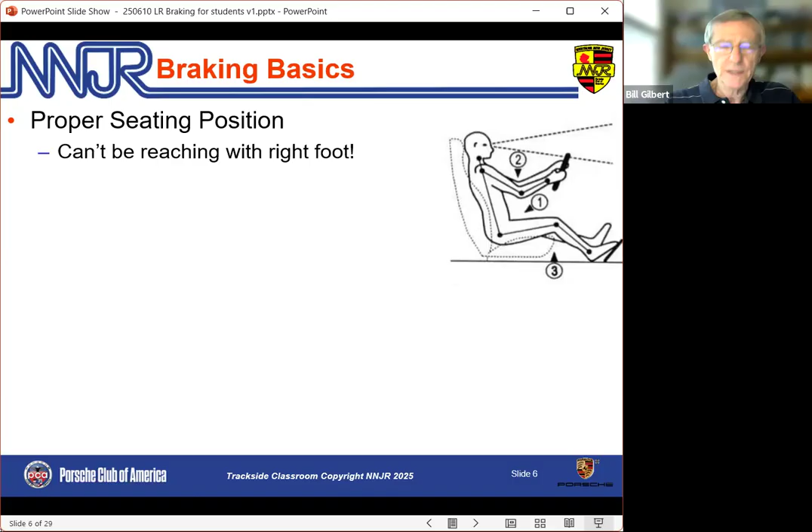Our right heel should stay on the floor. It should pivot between the gas pedal and the brake pedal. You shouldn't have to move your whole foot — we simply want to swing that foot. And if you're not doing that, then obviously that's a first step to practice.

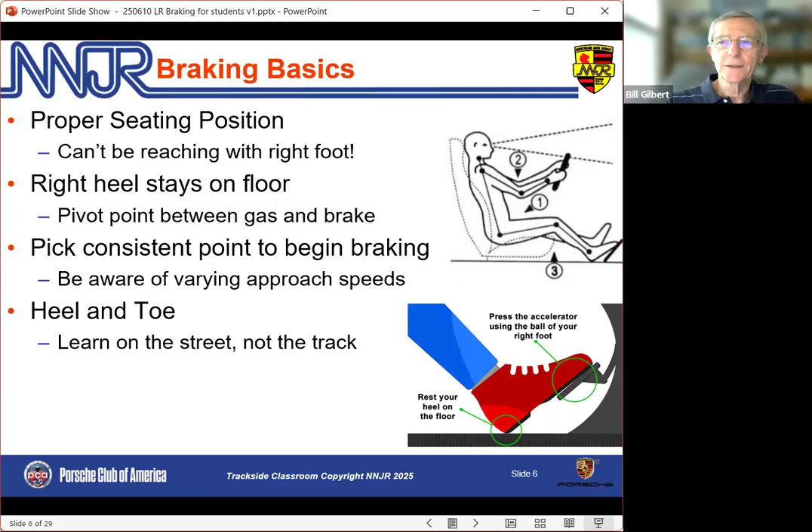As a beginner, or even maybe a yellow or blue student, we want to have a consistent point where we begin braking. I highlight that because you're probably, as a student driver, going to be approaching that brake point at different speeds depending on how well you did the previous corner, or perhaps traffic in between. Using a consistent braking point and learning to adjust using that same point is an important step in your learning process. And if you do have a car with a manual transmission, it's hard for us to teach you heel and toe on the track — you need to practice that and learn that on the street.

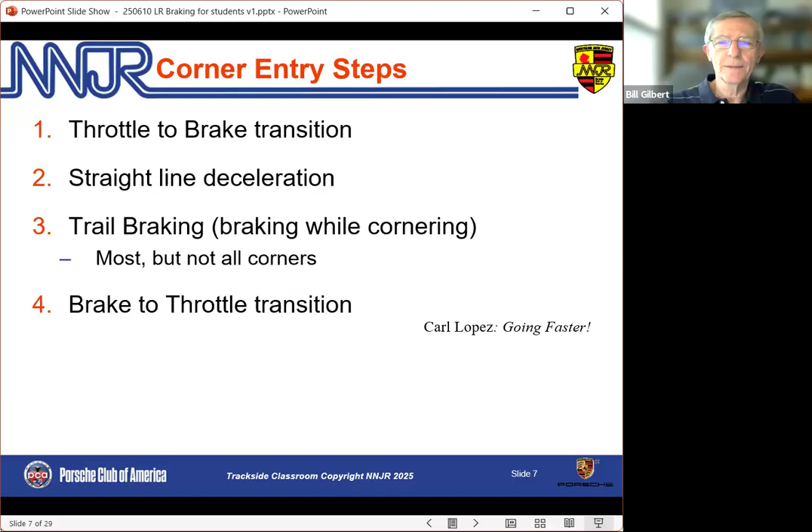So as a next step, what are those corner entry steps? We're now going to zoom into step three in the original outline. If we break it down, we're going to pivot our foot from the gas pedal to the brake pedal, and we're going to do that as quickly and smoothly as we can.

Then we're going to press on the brakes to slow the car down in a straight line, and by the way, that's where 90% of the slowing or more should happen — in a straight line. Then in most corners, we're going to continue braking at a very light level as we turn in, and then at some point after we turn in, we're going to come off the brakes and get back on the gas.

That point of coming off the brakes is called brake release. As Ross Bentley says, that's where the magic happens. If you're an advanced student, that's something you should pay a lot of attention to, and your instructors may have already pointed that out to you.

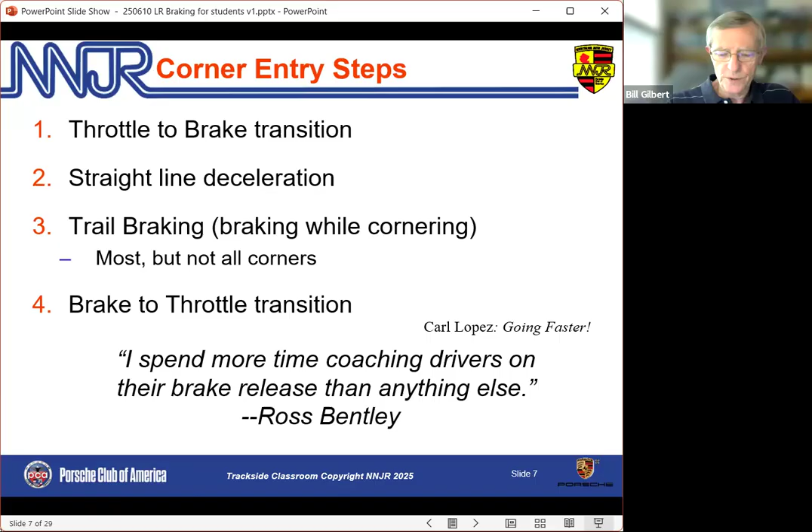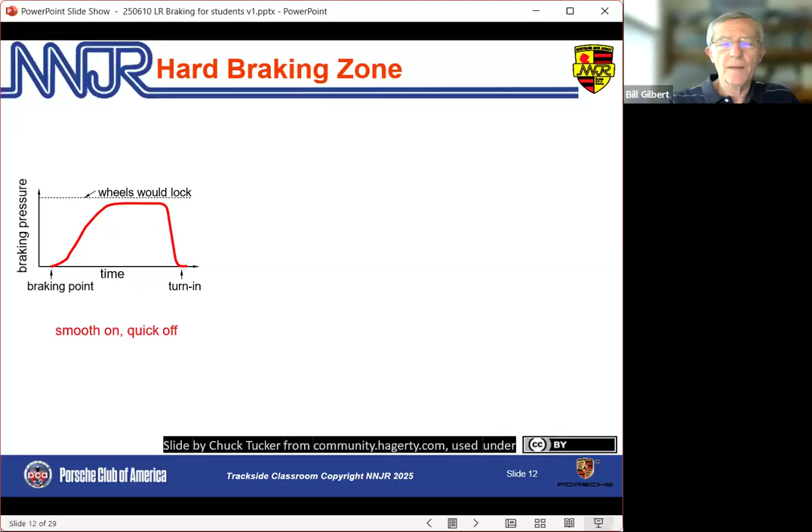Now let's talk about a hard braking zone. If this top line, where it says wheels would lock, is maximum braking, here's an example of getting on the brakes smoothly and then coming off very quickly, almost jumping off. Here's a different example where we get on the brakes immediately as hard as possible, stay on them, and then come off again very abruptly.

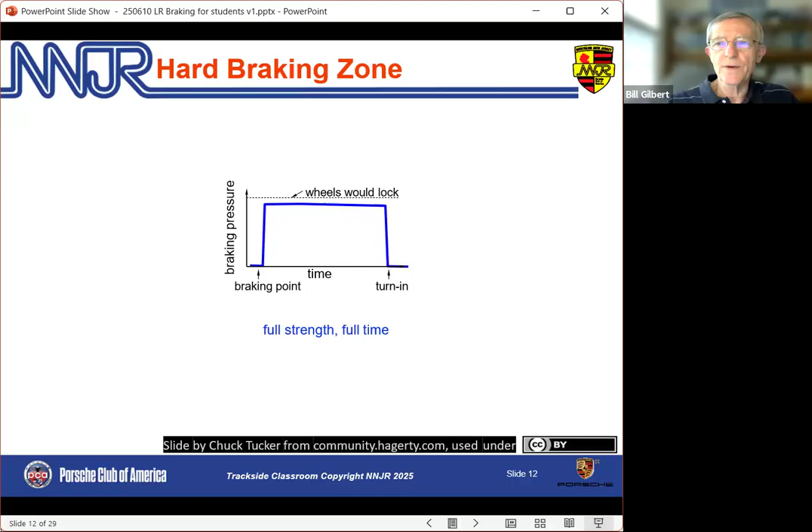Well, neither of those is what we want. This is what we want. This is where braking on the track is the opposite of what we do on the street, because we want to get on the brakes quickly but smoothly, and come off in a much more gradual fashion. How steep that slope is coming off will vary, but the shape should look something like that in virtually every corner.

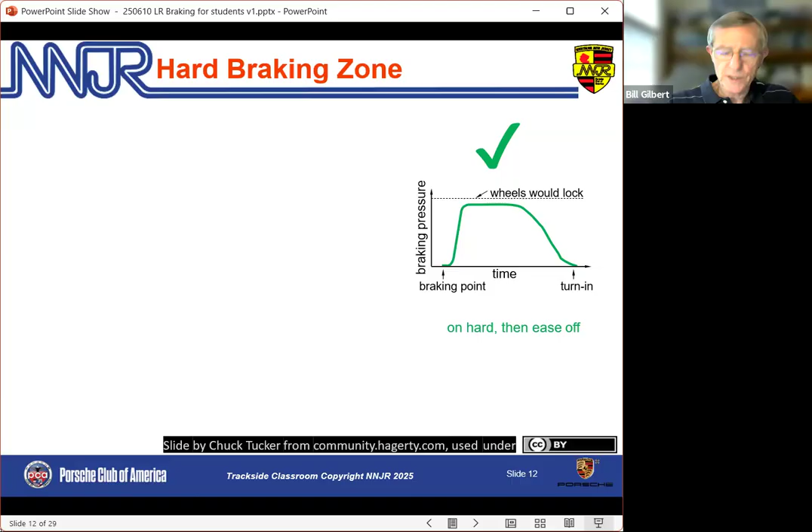So what are some common braking mistakes? If you're a beginner: an inconsistent point where you get on the brakes, inconsistent amount of brake pressure, and jumping on and off the brake pedal is very common.

Also, mimicking what we do on the street, where we get on the brakes at the right point but only softly, maybe at 40%. Then we realize we're approaching the corner and need to slow down a lot more, so we get on more brake. That's the opposite of the graph you saw on the previous page.

For more advanced students, we still see too little pressure early and too much late. Not as dramatic perhaps as a green student, but it still happens.

A very common mistake is going from heavy brake to heavy gas. In other words, we're into the corner, we've gone in on a fair amount of brakes, and we quickly go from that brake right onto the gas pedal. That obviously upsets the car.

And we see people trying to brake late. Most of us aren't ready to brake late in the yellow and blue run group, because if we do that, we put a lot of stress on how smoothly we can come off the brakes and exactly how much we can slow down. We end up with inconsistent entry speeds and inconsistent amount of braking, and the net effect is you end up not being able to exit the corner smoothly.

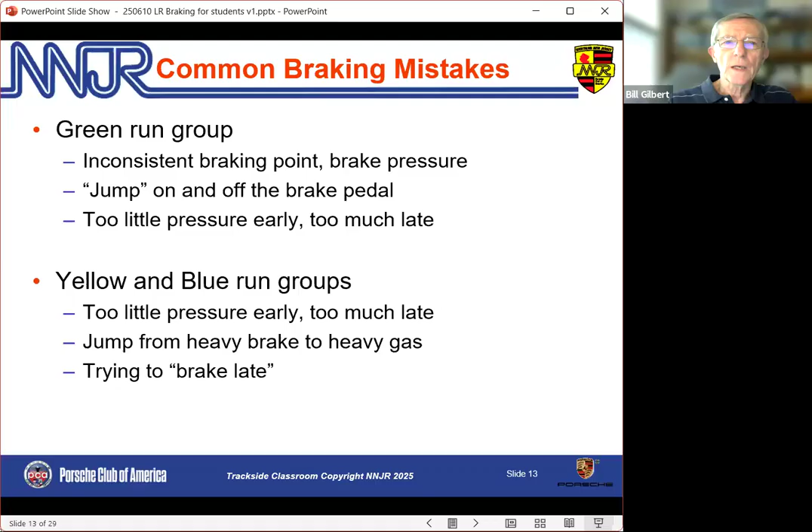So let's look at a couple of tracks. Let's talk about Lime Rock and what that means for braking. There are no slow corners at Lime Rock, but there are high speeds. Really only one heavy brake zone, and that's turn one.

That is a classic trail braking corner, meaning the first half of Big Bend, turn one, is followed by a tighter corner, which means we can't accelerate. So we're going to extend the front straight by braking as long as possible. That's what we mean by a long trail in turn one.

We have somewhat the same situation in the left-hander, where we're trying to set up turn four, the right-hander, and therefore we can carry a lot of brake into the left-hander.

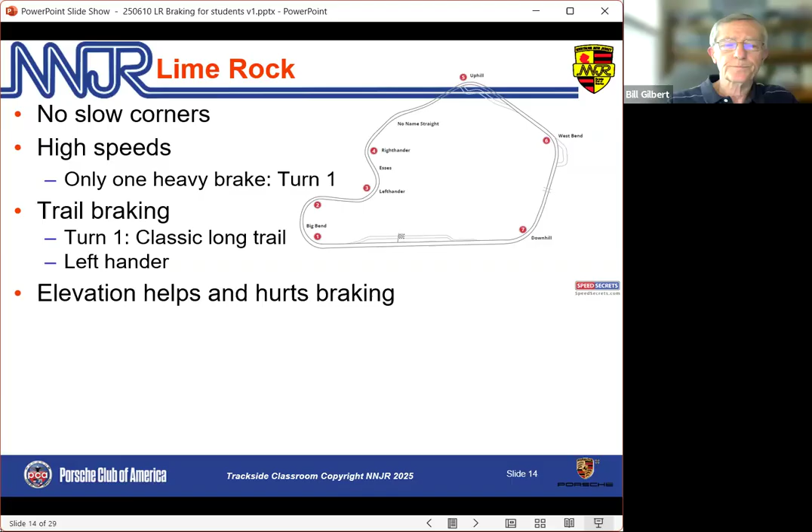Elevation, like all tracks, helps and hurts braking, and the turn names give it away. The uphill is uphill, and that certainly helps our braking. The downhill is the reverse, pretty obvious. Interestingly enough, for a short track, Lime Rock has three fast corners: the uphill, west bend, and downhill are all very quick.

What that means for braking is the opposite of turn one and the left-hander. We do not want to do trail braking; we want to do 99% of our braking in a straight line.

And we want to do that not with a dramatic brake, but with a gentle brake, which means it might start sooner than we think, but be very gentle and come off gently, because we're trying to maintain the balance of the car so that we can get through those fast corners.

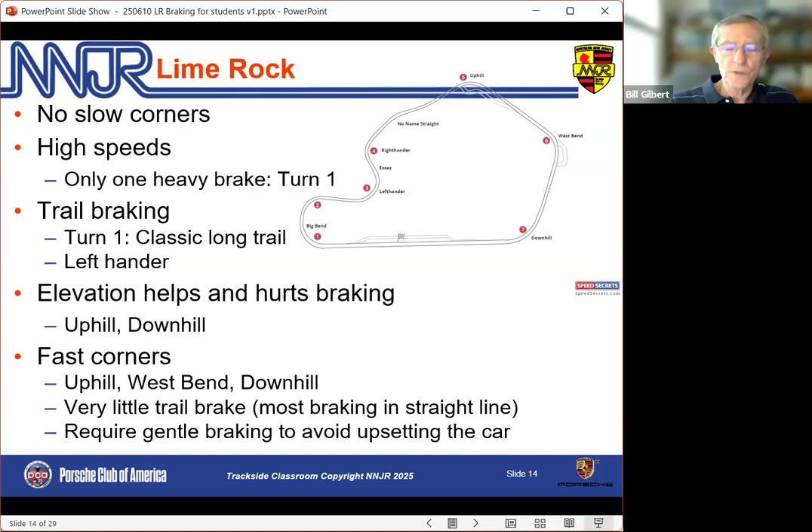Let's talk about Watkins Glen. We can tell a similar story. Again, there's no slow corners. I've sometimes called Lime Rock half of Watkins Glen for that reason. But in any case, there aren't any slow corners. There are high speeds, and that results in two really heavy brake zones, especially turn one. But the bus stop is also a heavy brake zone.

We have a number of corners where we can trail in some amount of distance. Each one varies, of course, but turn 6, 8, 9, and the bus stop all reward a fair amount of trail brake. Again, we have elevation that helps and hurts. We have turn 6 downhill followed by an uphill in turn 7. And we have fast corners, turns 10 and 11, just like I described for Lime Rock, very little trail brake, and do it in the same gentle fashion.

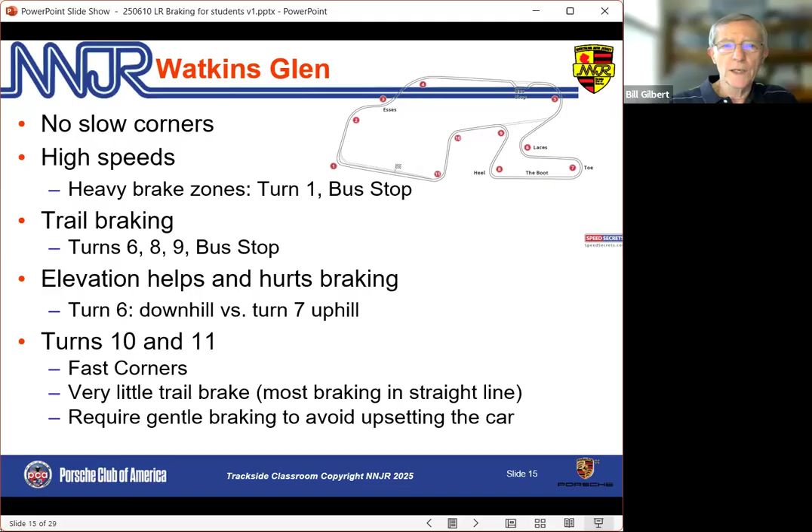So to help think about how we use the brakes, I ask you to think about brake pressure on a scale of 0 to 10, where 0 is no brake, 10 is you're in the ABS, or you've locked up the wheels in an older car. For maximum braking, we want to be at kind of 9.5, just before the wheels lock up. But that's how we should think about how hard we're pressing on the brake pedal.

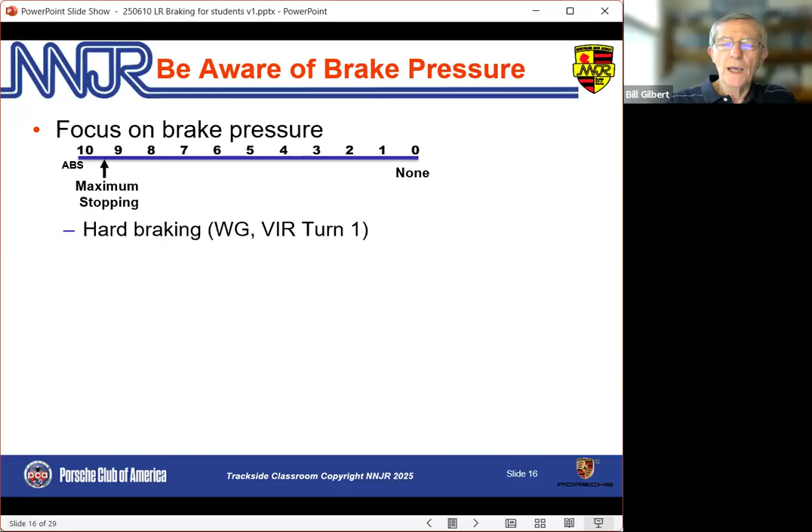And for those really heavy brake zones, like that Watkins Glen turn one that I showed you, same thing at VIR turn one, and to a lesser extent at Lime Rock, we want to get on the brakes and use them. We want to get to that 9 or even 9.5, in the early part of the brake zone.

But look what happens as we get further into the brake zone. Yes, we stay at that hard brake, but now we begin to lessen the amount of brake pressure, for two reasons. One, we want a smooth trail off, but secondly, as we slow down, we don't need as much brake pressure. The same amount of brake pressure will lock up the tire, or activate the ABS. So the car naturally wants us to do this anyway. And at some point, depending exactly on the corner, at two or three, or somewhere in that range, maybe between one and two, we're going to turn in.

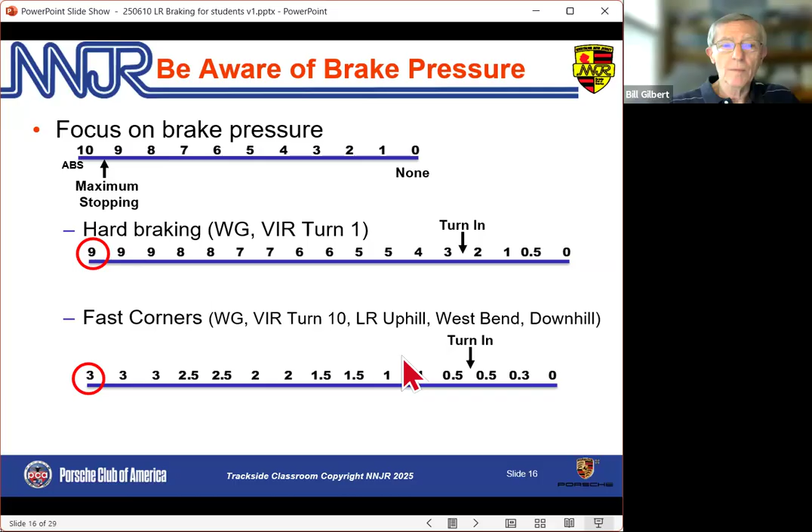Now, fast corners look very different. Here we're talking about Watkins Glen or VIR turns 10, the uphill, downhill, and West Bend at Lime Rock. Here we want to start braking at probably a three or something like that. And we want to just do a slow, gentle trail off. So by the time we're turning in, we're barely on the brakes at all. Maybe we're not on the brakes at all whatsoever. Depends a bit on the car, but you get the idea. And not much at all by the time we get to turn in.

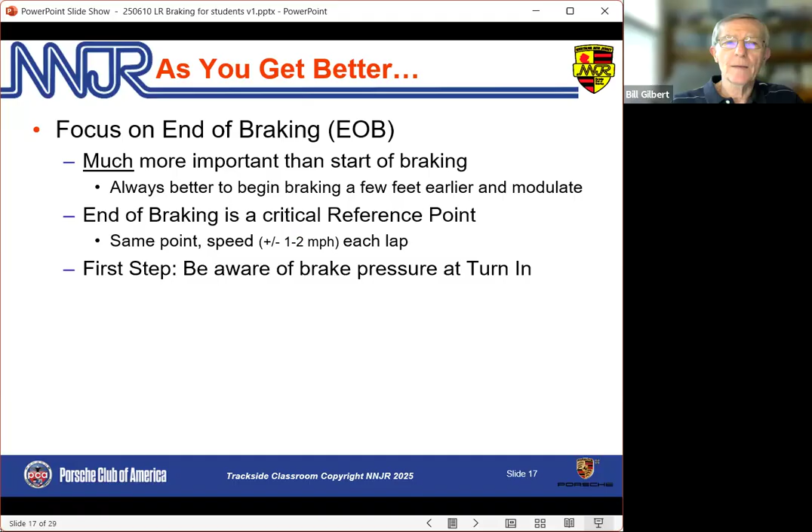Now, as you get better - here's for those of you in blue and advanced yellow - focus on your end of braking. Am I coming off? It's much more important than the start of braking, because we can always brake a few feet earlier and modulate to get to the same end of braking point, which is why it's such a critical reference point.

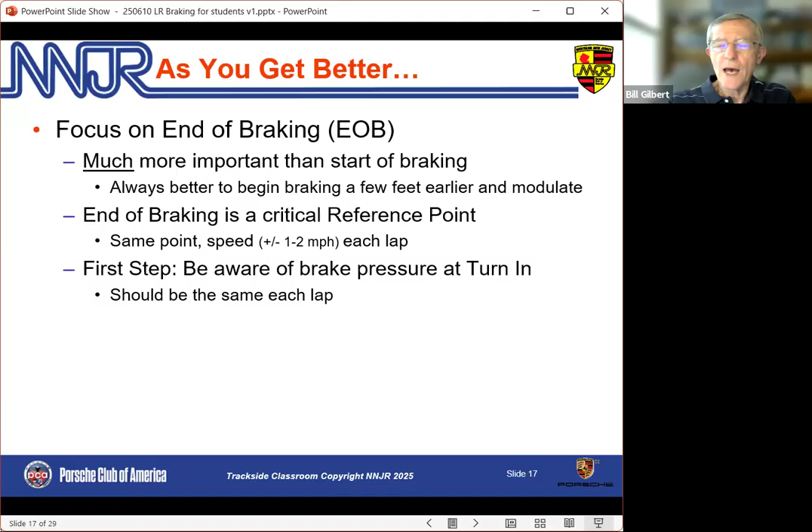And you want to be aware of not only where that point is, but how you're coming off the brake at that point, and focus on making that consistent. And one way to help with that is to be aware of your brake pressure, your amount of brake pressure at turn in, and make sure that's consistent. If it's a 2.5, make sure it's 2.5, lap after lap. If you're a beginner, you can ignore this slide, other than as something that you can strive for down the road.

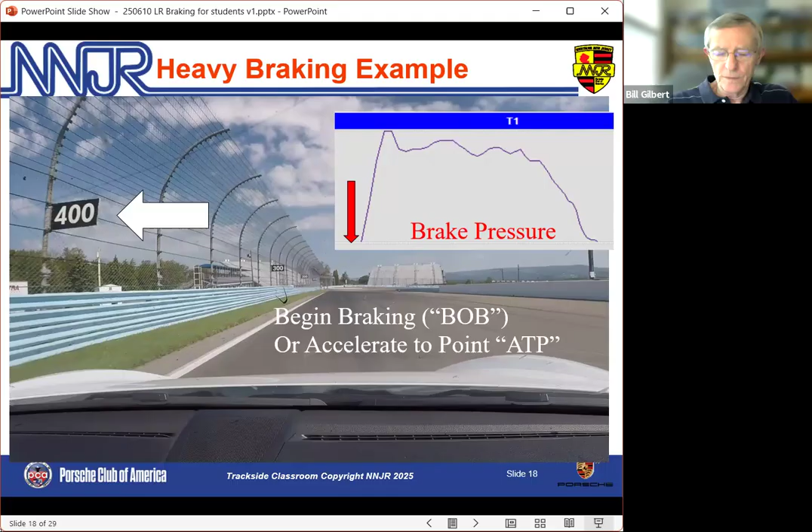Now, here's a heavy braking example to kind of show you a real world example of what this means. And here we've got real brake pressure now. This is a brake pressure trace from my car, and shows you exactly how much brake I was using. In this example, same slide I used earlier, I'm not on the brakes yet here. I'm just moving my foot from the gas pedal, swinging it over to the brake pedal at the 400 mark in this example. By the time I'm at 350, now I'm on the brakes and I'm ramping up the pressure.

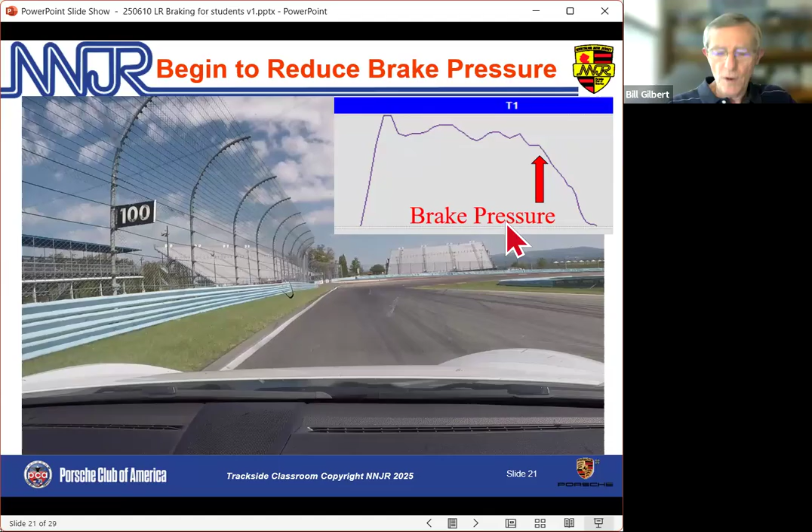By the time I'm at 300, I'm on full maximum brake pressure. And notice that brake pressure holds pretty high for a while. In fact, you're going to see it stays up there until almost the 100 mark in this example. And then it begins to taper off, because by the time we get to turn in, we can't be braking that much or the car won't turn, right?

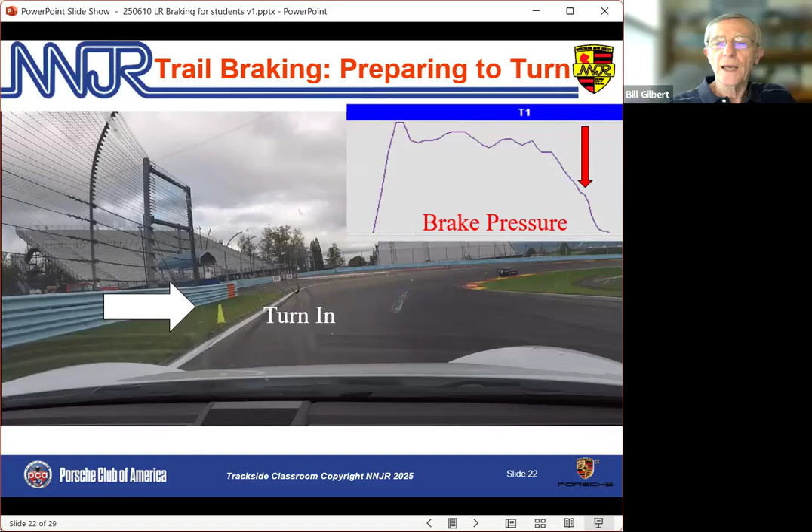At turn-in, my brake pressure has dropped a lot. I've come off the brakes, and the more I turn in, the more I come off, to the point where halfway to the apex, there's no brake pressure. That's what it looks like in the real world, in a very heavy brake zone.

Here's what it looks like at Lime Rock for turn one. I come off the gas pedal at the 5 marker and start to move my foot, but there's no brake pressure yet because we aren't on the brakes. In this particular trace, this point here is about 4.5, where I begin to get on the brakes. I didn't do a very good job of getting on them—I kind of pussyfooted around here too long, rather than going straight to more brake pressure.

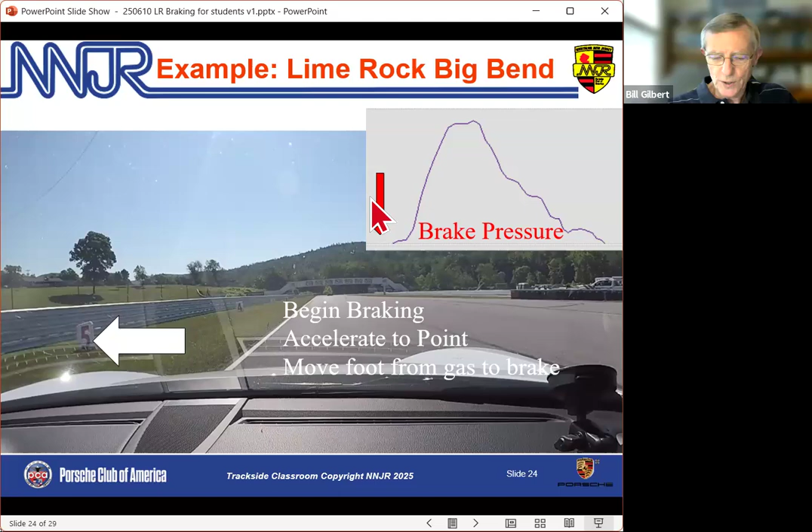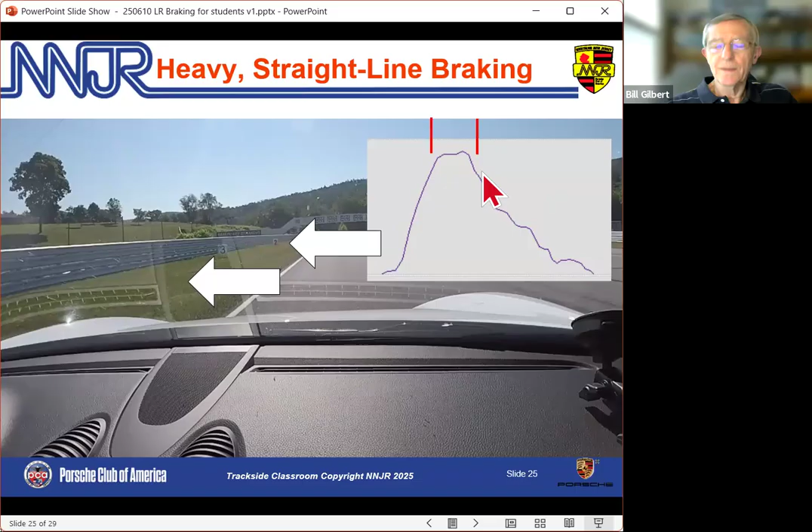But notice there's a peak here, and at Lime Rock in this example, it was from about 3.5 to about 2 on the brake boards, and then began to trail off. As I said earlier, we're extending the front straight into turn one, so we expect to see a long trail off. So here's the one marker.

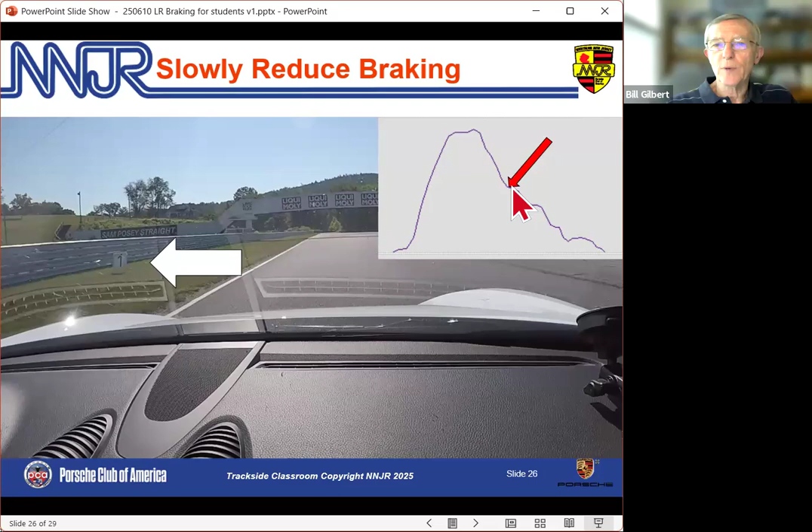Now the brake pressure is well off, but the end of braking doesn't happen until abreast of the first apex. That can be improved if you're really good at it. As a beginner, this would be very good, but I should be doing better than that—my end of braking should in fact be further up, because we're trying again to extend the front straight.

I hope the shape of the brake trace here gives you an idea of how to think about this kind of long trail type corner, which is somewhat different than what you saw in the turn one Watkins Glen example, where we have a more classic corner with a short amount of trail brake versus this one with the long amount. So to summarize, if you're a beginner, you've got to focus on that track braking technique.

Make sure the seating position is solid, the heel pivot. Get used to that hard initial brake with a gentle release. That's the most essential basic of braking on the track. It helps mentally some people to think about doing most of your braking in the first third of the brake zone, because there's actually some truth in that—so much braking happens in a straight line when we get on the brakes hard that it makes the rest of the brake zone easy.

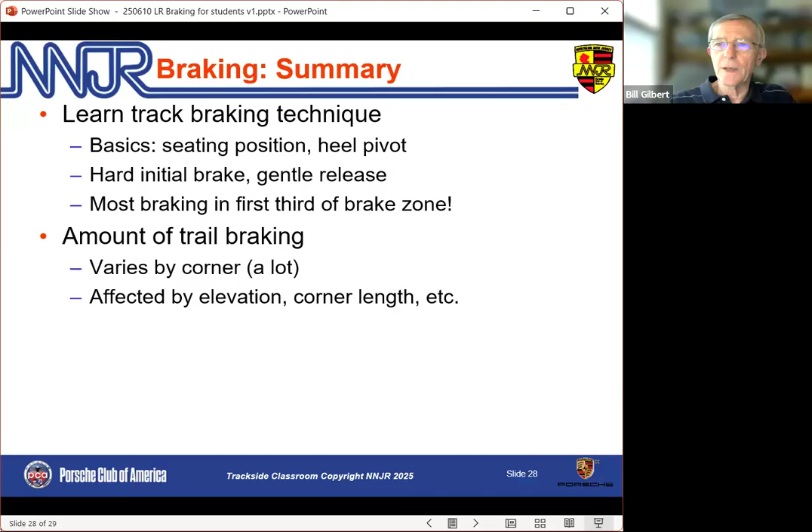As you get more experience, you can think about the amount of trail braking, and as we've discussed, it varies a lot depending on the corner, and it's affected by elevation, corner length, all kinds of things. As you get better, you can focus on that end of braking—work on that smooth transition off the brake and onto the gas.

The goal here is that if I were to ride with you, I couldn't tell when you came off the brake and got on the gas pedal. That's what you should strive to do.

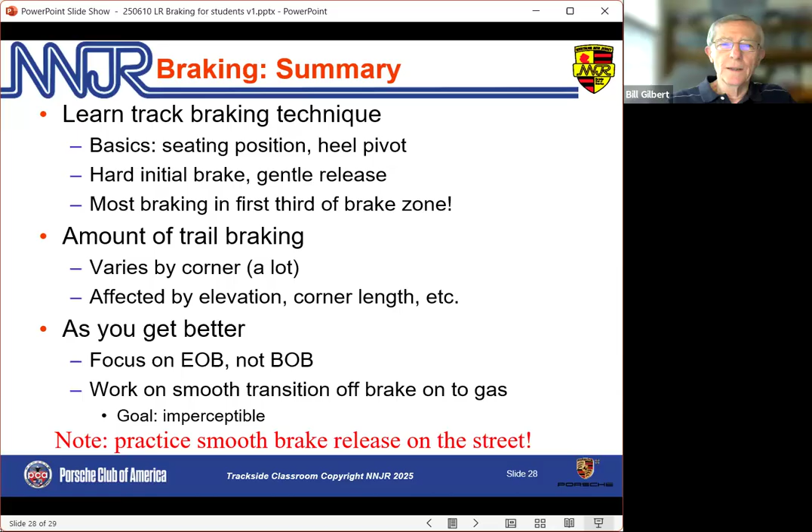You can practice that on the street—coming off the brake smoothly as you slow down for a corner, an entrance ramp, or even as you come up to a stop sign. You can practice coming to a stop in such a way that the nose of the car doesn't even pop up. There are ways to train that right foot to get it much more sensitive to how it comes off the brake pedal. I strongly encourage you to pay a lot of attention to that in your day-to-day street driving—it'll get you a big step forward when you get to the track.